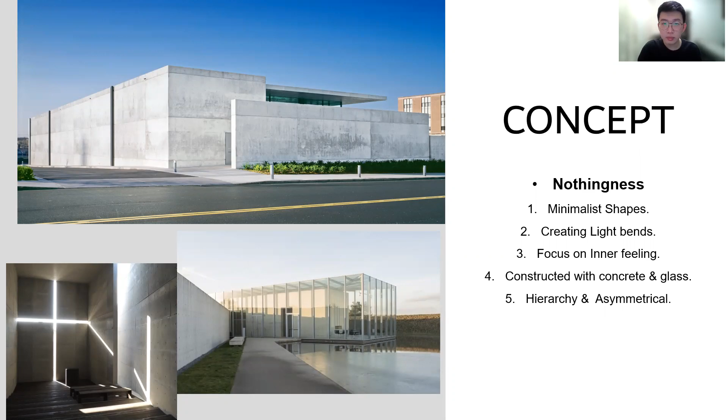Next is the site response, the site. There are two locations for my site, in the bamboo playhouse area. The first location is near the lake. The advantage is better privacy, because the private space like the master room or studio faces the river, creating a better viewpoint since it faces the lake directly.

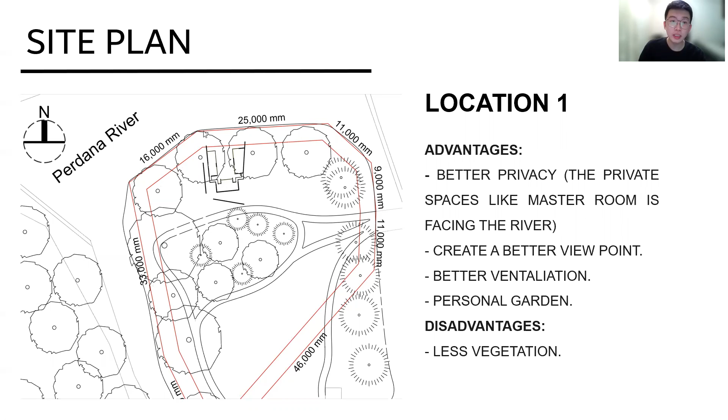It provides a peaceful view and better ventilation, and there's a personal garden in the middle of the building, with a wall blocking the inside and outside so the client can enjoy his time in the personal garden without distraction. But the disadvantage is less vegetation, because compared to the middle of the island, the vegetation around this building is lesser.

For location two, which is in the middle of the island, the advantage is more vegetation, more trees surrounding the building.

But there's still a lot of disadvantage, such as less privacy, because in front of the building is the bamboo playhouse, so there should be a lot of tourists and visitors going to the site. So it causes a lot of noise than the location one, and also it's close to the main road.

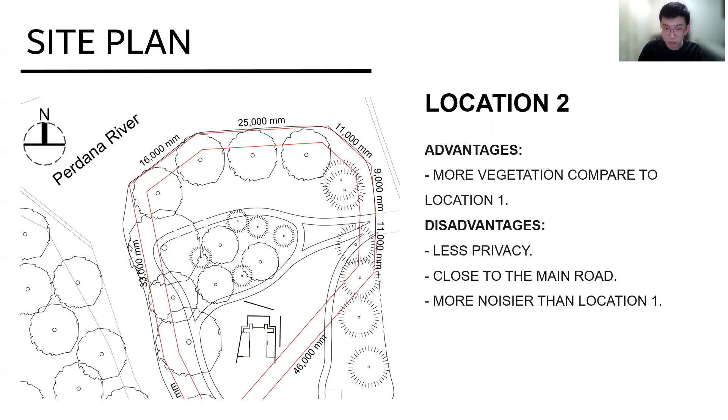Next, here's the criteria matrix. There's one living room, one kitchen, one dining room in the public area, and also a public toilet and a personal garden. For Tadao Ando, our client, there's a master room, bath, private bathroom and studio for him. And for another part of the building, there's two guest rooms and two bathrooms for the guests, for example his friend or family. So the total area will be around 121 meters square.

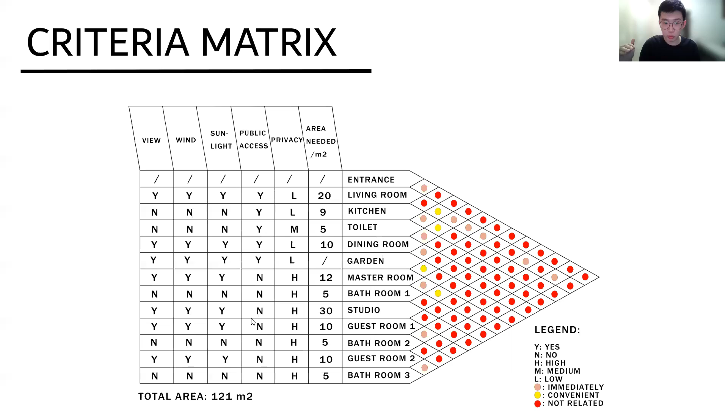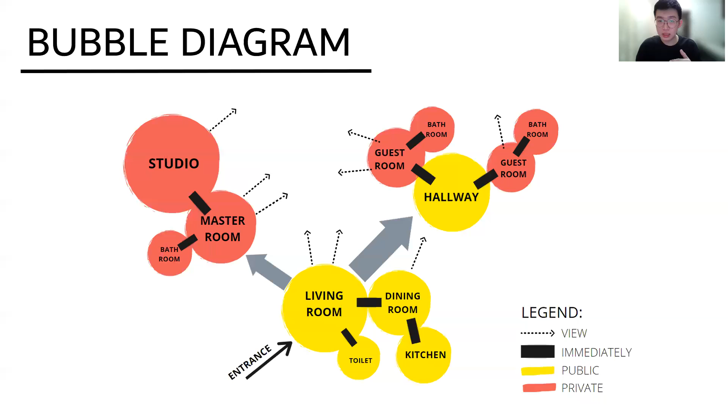So next, the bubble diagram. Here's the entry. When you go through the entry, straight away you go to the living room, and the dining room and kitchen are linked together, so from the living room you can go to the dining room and kitchen. And from the living room there's two parts you can go: one part is only for our client Tadao Ando, which is the studio and the master room, and another part is a semi-private space for the guests, for example his friend or family.

And here's the space planning diagram. There's three parts of the building. The first part is the public area, which is living room, dining room, kitchen. Another part is for Tadao Ando, so here is the studio and here's the master room. From the living room, Tadao Ando can go to his private area, and also the guests can go to the guest room from the living room.

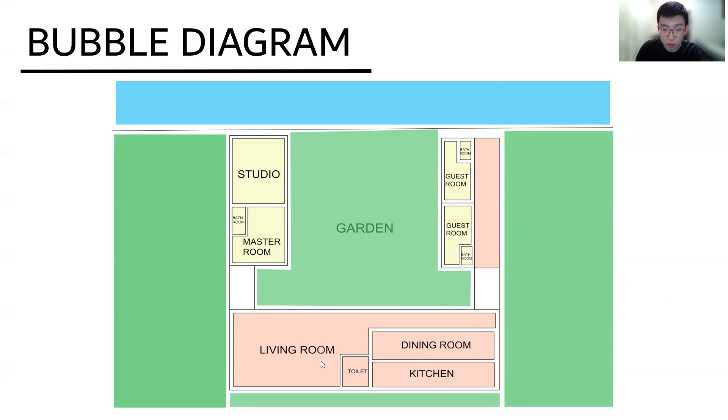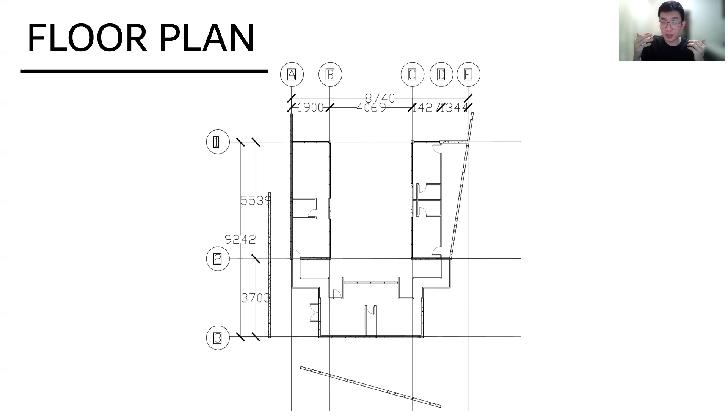So here's the floor plan of my building. For the structure system, I'm using the shear wall system, and for the material, most of the material is precast concrete, and also there's floor to ceiling windows to provide sunlight to flow in. The asymmetrical part is to make this part more voluminous than the other part, because this part has a curve, and also there's an opening on the roof, so it allows the sunlight to flow in through. It also provides a misty atmosphere.

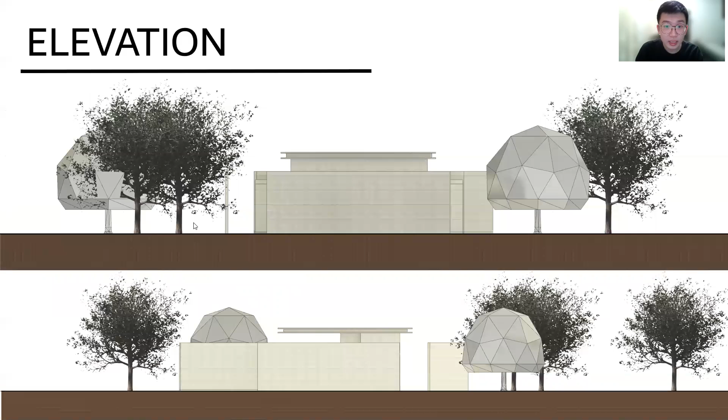And here's also the elevation, and here's section XX and YY. As you can see, here's the opening on this part of the building, so the sunlight can flow in through here, so in the morning you don't need light to light up the room, because this part can just allow the sunlight to flow in, saving lighting and electricity.

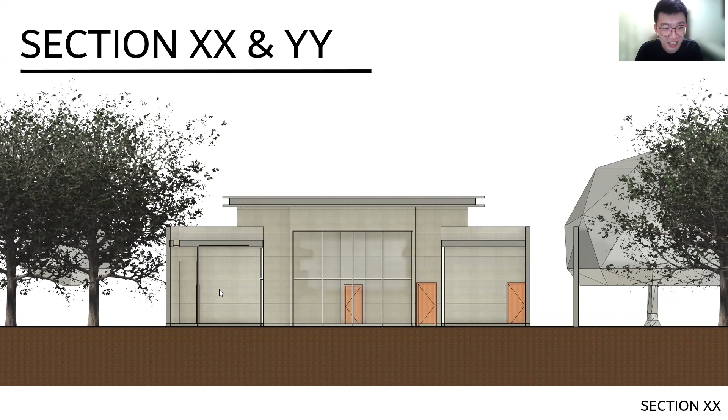And this is also a section, here's section YY.

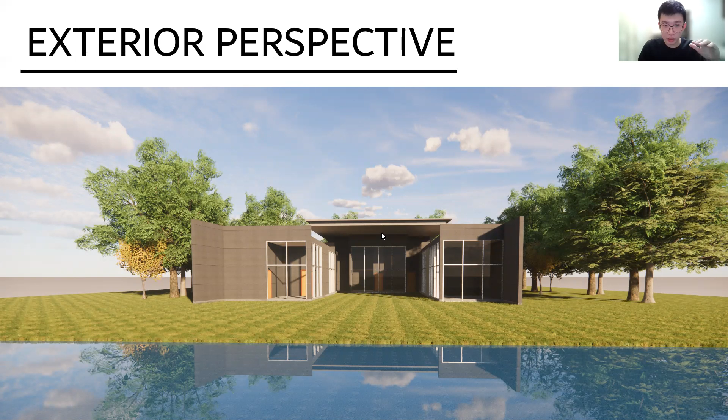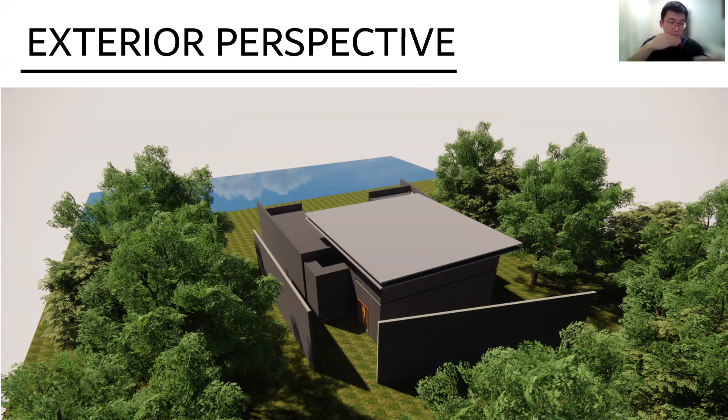Here's the exterior perspective of the whole building. As you can see, I try to play with the shadow and the lighting, and I also create two walls at the entrance of the building, so it provides better privacy, and second, it provides a hidden entrance. Also, Tadao Ando loves to use walls placed differently to create a better viewpoint.

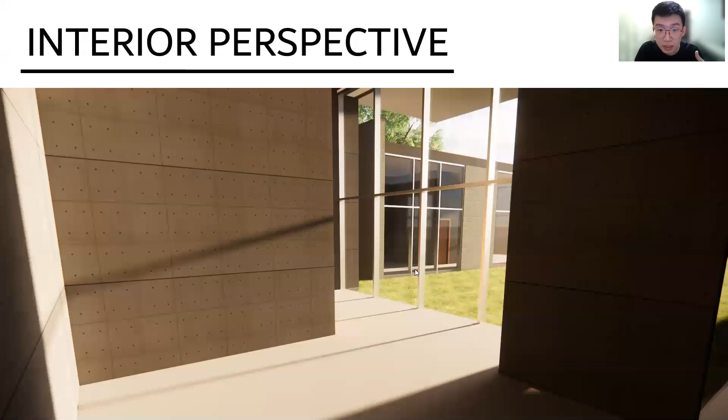Here's also the exterior perspective, and here's the interior perspective. Inside here's the living room, so the large floor to ceiling window can allow the light to flow in through, and here is the personal garden for Tadao Ando or for his guests to go in through and enjoy their time.